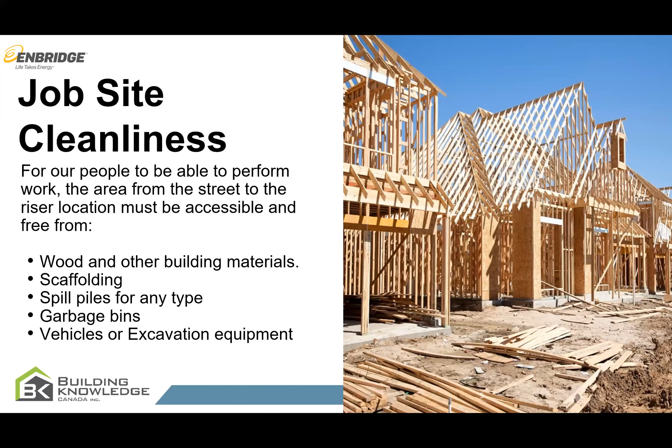So when we're coming out, and even for the safety of your own people, just make sure that you take some time to make sure the wood, the other buildings, scaffolding, any types of garbage or spills, anything that could be hidden under snow, which was a situation we've been experiencing - drywall and that type of thing become projectiles if you step on them when they're on top of ice. And the outcomes, like I said, can be life-changing for people. So just a quick reminder on job site cleanliness, and we'll go to the next slide.

Thanks, Stacey. Just a quick reminder to everybody out there, builders and HVACs, when you know that we're going to be coming to install, please remember to mark your meter location. It really helps us and you to avoid any sort of delays or ending up with a meter in the wrong spot. Please mark where you want the meter installed - just a little inverted T, with the bottom of the horizontal line letting us know the level of the final grade, and the vertical upright line indicating the meter riser location. Greatly appreciated, and with that, I'll turn it back over to Andy.

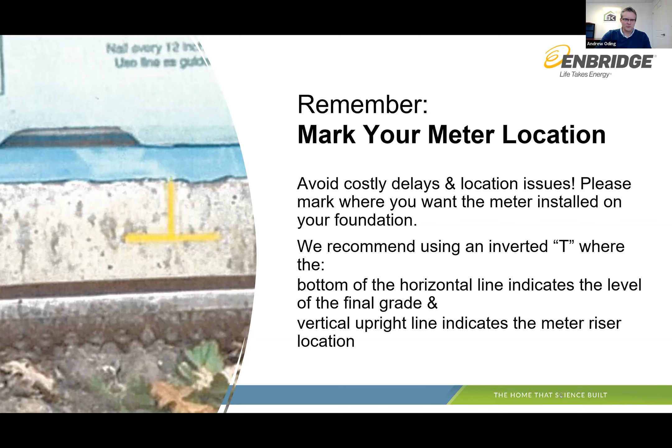Brett Cass - I actually found this sort of cool. I never realized Brett went to school in Pittsburgh, Pennsylvania. Spent a little time south of the border.

Brett has his bachelor's of environmental science. Brett was the first and is the longstanding technical manager for the net zero energy housing program and projects at Canadian Home Builders. Brett, you've done - you're a certified energy manager, your REA, your LEED Green Associate, all these things. I've often found it very cool that you understand the work that even we, some of us geeks at Building Knowledge, do, because you've done it yourself. So it's good to have you. Awesome, yeah, thanks a lot for having me. It's certainly a pleasure to speak here today.

It's like watching a horse race, Brett.

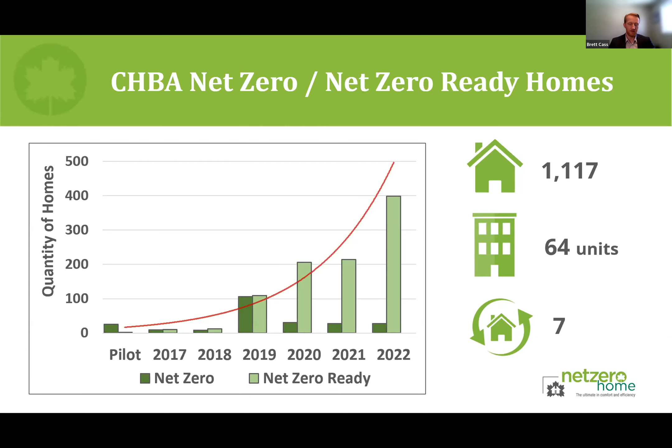Brett, do you have any sense of where things are going to head over the next year or two as far as those numbers? Do you expect them to go up? Do you expect them to level out? Not to put you in a difficult spot, but...

No, I mean, we do certainly from what we hear anecdotally from our energy advisors, from builders that have been reaching out, from the numbers at our training sessions, we expect the trend to continue to keep going up. So our training has been generally a big tell of what's going to come down the pipe. Often you see builders join the training and it takes a year or two to actually build the home and get the label through for their first label. Our training numbers have been really great, especially over the past year or so.

Very nice. So qualified participants - we were at 91 qualified net zero builders, as of 2022, with a few more coming in at the start of the year. Note that a qualified builder has already built their first home as well, so after they've taken the training, they've also built their first home. We also have 7 qualified net zero renovators, 48 qualified net zero energy advisors, and 13 qualified net zero service organizations across the country. So certainly some good growth in our qualified net zero participants alongside the homes.

All right, so moving away from just the general numbers, we're going to start looking at the mechanical systems - the average space heating and cooling systems that are used, as well as the domestic hot water systems. Starting with space heating, we've grouped the configurations on the left there, and the quantity of homes is on the horizontal axis. This includes both net zero and net zero ready homes, and for the most part, the whole data set for this presentation is both labeled types.

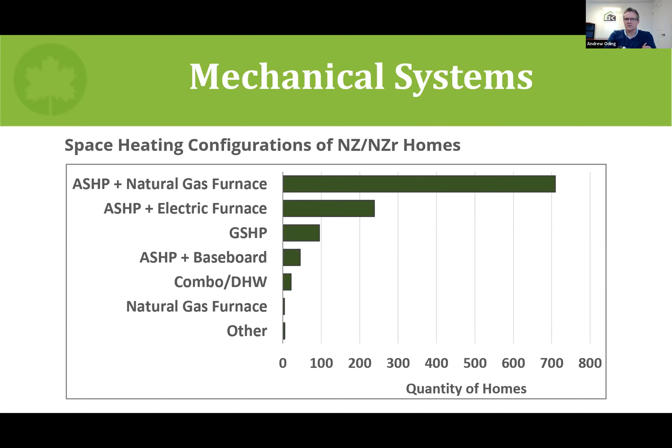So with that, a high efficiency backup, but it seems like the air source heat pump is starting to lead the way and be the primary source for heating and cooling as well in these net zero and net zero ready homes. It also speaks to the fact that a lot of the distribution system of the heating and cooling is ducted as opposed to non-ducted. There's plus and minuses about both depending on preferences, but it's interesting to see that a lot of it is ducted systems. Yeah, very true.

All right, so jumping to domestic hot water systems - what water heating configurations are these homes using? Largely, I think the word for this is just kind of conventional, high efficiency, but conventional. We're seeing gas instantaneous water heaters, obviously paired up with those gas furnaces in that group of homes. Also seeing just a conventional electric tank, and the heat pump is coming online a bit as well. More heat pumps have come through in 2022, but certainly nothing out of the ordinary on the water heating side of things.

It's so interesting to me that the air source heat pump hot water heater is as close to the regular conventional electric tank as it is. Yeah, I think that's a newer trend in 2021, 2022. It wasn't as high of a percentage in years past. So something newer that's coming on board.

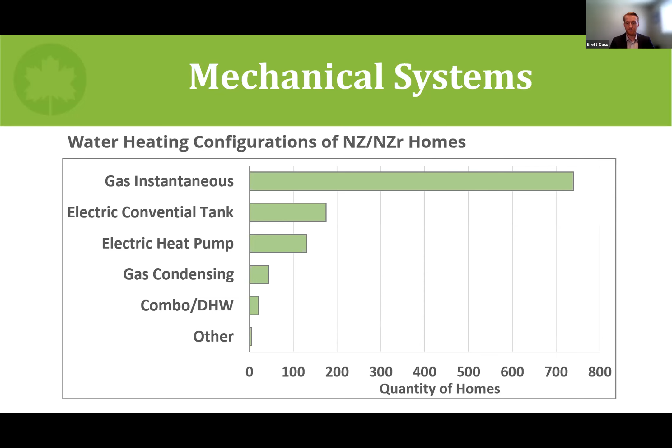Envelope performance. In this piece of the presentation, we're specifically going to look at the building envelopes, and we're going to look at it in a variety of metrics. We're going to talk about air tightness, some of the envelope improvement percentage metrics - those are the ones that compare to the reference house - and we're also going to talk about general building assembly, so what are the R values these builds are often achieving.

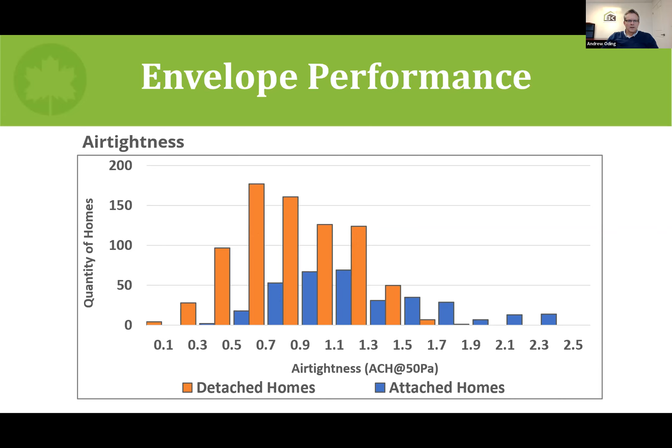Would you be comfortable surmising, Brett, that with the attached buildings - the MURBs, the townhomes - that almost without fail the builders are using an air barrier between the units to compartmentalize, going beyond code to do that? I don't have that data, Andy. You might be able to speak to that from the experience in your group. I have heard that anecdotally, but I don't have the numbers to match.

I would say that's typically what we see, but those are really good numbers all around for attached. Most of the time we do see it's achieved because someone thinks to put an air barrier between the units. So in this chart, we're looking at envelope performance in a different way - this is the envelope improvement over the reference house.

I'm sure most people on the call are familiar with the reference house, but as a reminder, the reference house represents kind of a code-minimum version of the actual home. The geometry is the same, but the assemblies and other pieces are brought down to code levels, so that you can compare how much better your actual home is compared to the reference house.

In this chart we do it in such a way that you're looking at only the envelope improvement over that of the reference house. We have the quantity of homes on the vertical axis, and on the horizontal axis we have bars for detached homes as well as attached homes, showing percentage. These are 2% buckets as well. I should also mention that in our program we have a minimum threshold of 33% better for the envelope improvement percentage - that's why the chart starts at 34, but very few homes are down in the 30s.

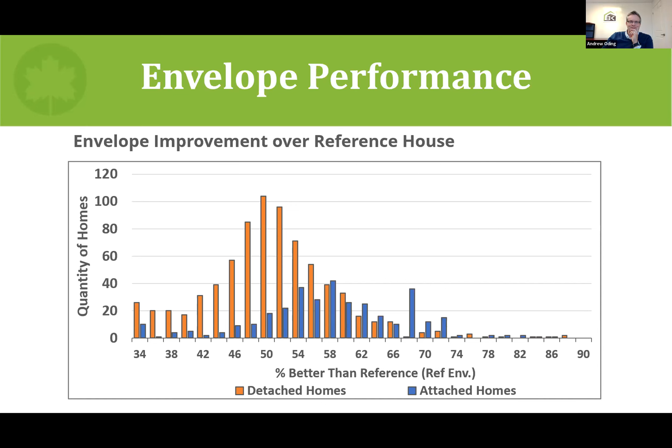Staying on the topic of envelope performance, now we're going to look at a metric most people are probably familiar with, which is R value. This is the thermal resistance, the R value of above grade walls, and we're looking at it by climate zone. Climate zone 4 is your warmer climate zone.

That's in green there, that's Victoria, Vancouver, moving up through climate zone 5 in Southern Ontario. Climate zone 6 would be places like Ottawa or Saint John, New Brunswick, and climate zone 7 is even colder: Calgary, Edmonton, Saskatoon. We actually have one home in climate zone 7B, our first climate zone 7B home came through this year, but we didn't put it on this chart because it's not statistically relevant.

But these are called box and whisker charts. So the actual box, if we look at climate zone 4, that green box represents the 25th percentile up to the 75th percentile, and the lines represent the remaining range. There are a couple outliers that didn't fit into these data sets and are removed, so the scale is relevant, but this represents 99% of the homes. The median, the average, is represented by the number in the middle.

What you'd expect as you go up the climate zones is that you'd see a higher R value per climate zone, which is essentially true between climate zone 5, 7A, and also true if I add that home from 7B. But the climate zone 4 homes seem to have gone higher. I don't necessarily know the reason for that, I only get the data. But one important piece to note is that there's only 14 homes in that climate zone 4 data set, where there's hundreds in 5 and 6, and 57 in climate zone 7A. So the data set isn't as strong as some of the others.

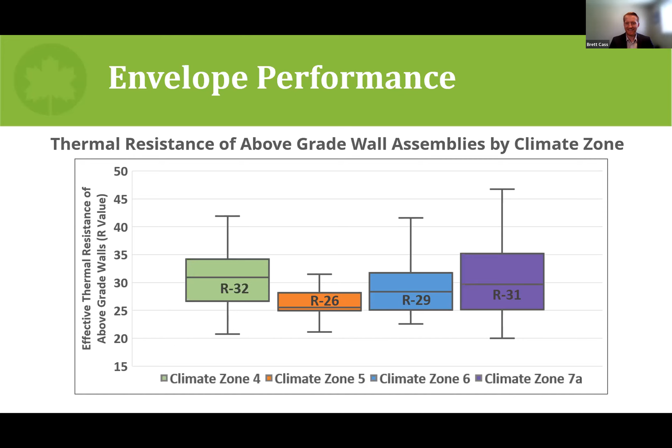Good. Now the next slide is the ceiling assemblies. Same approach, we're looking at the thermal resistance of ceiling assemblies. If I were to show them in box and whisker, they were relatively tight quartiles, so I'm just showing the average here per climate zone.

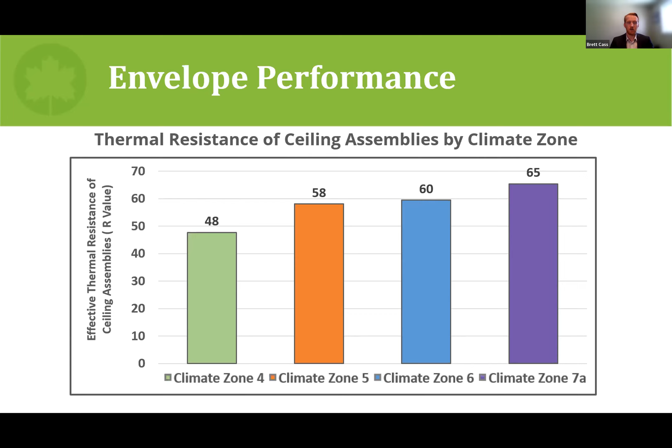And this is a more true curve that you'd expect: R48 in climate zone 4, up slightly in 5, up slightly in 6, and then up to R65 in climate zone 7A. Some builders are choosing to go higher, we do see the R70, the R80, the occasional R90 in the attic, but these are the averages, and they're relatively strong averages at that.

So now changing tides, moving away from the envelope performance and starting to look at the energy performance. We'll look at energy and envelope, mechanicals, renewables, and operational carbon a little bit later as well. But to start with, I wanted to show what a standard code-built home looks like on average, and then show what a net zero ready home looks like on average.

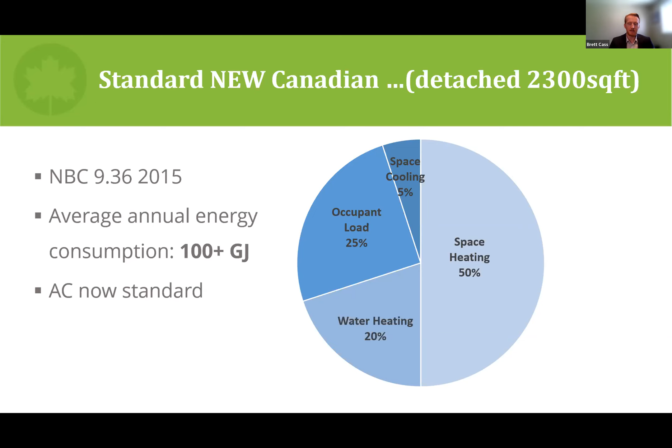This just shows the load breakdown to see where this energy is being used. This is a 2015 national 9.36 home, 2,300 square feet, detached home. About 100 gigajoules per year on average is what's being used. About half of that, so 50 gigajoules, goes to space heating. About a quarter is the occupant load, so that's your lighting, appliances. Water heating makes up 20%, and then a little bit for space cooling as well.

If we improve that exact same home, so that detached 2,300 square foot home, and made it into net zero ready, we bring it down to right around 43, 45 gigajoules or so. What's interesting though is that the load distribution changes quite dramatically. Now you can see that occupant load is making up over 50% in this case, and the space heating has gone down to only 25%, and that's not 25 gigajoules because this home is now only 43 gigajoules. So you're looking at just over 10 gigajoules to heat this home. Water heating remains a reasonable load, and then there's space cooling in there as a small load as well.

And the new load that comes on board is HRVs and fans. So the ventilation systems are starting to become a load that actually matters on the energy side. I know, Brett, you've broken this out too further in some of your reports and show what these averages look like for net zero ready multifamily, some of the MURB projects you folks have worked on, these multi-unit residential building unit over units.

What's even more glaring about those is that the occupant load hits 65 to 70% of the load, and the hot water load is almost the same as the space heating load. Yeah, or bigger, it can be quite dramatic. In some of our previous reports, we have some representations of that, and I do have a slide as well here that shows not multi-units, but it shows attached homes and compares to the sizes of the larger detached homes, and you can certainly see that occupant load really gets up into that 60%, 70% range in some cases.

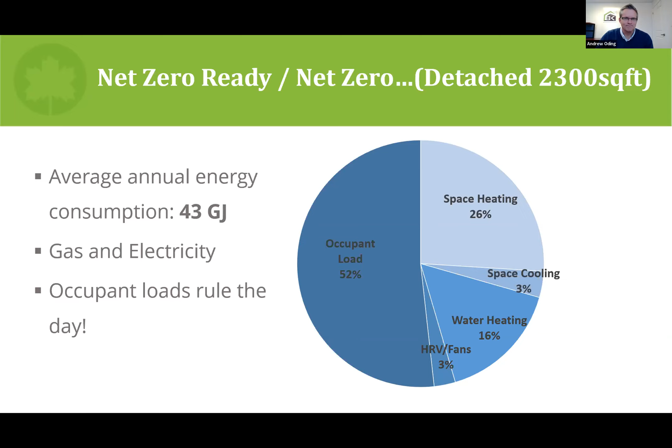That's something. All right, so in this chart, we're going to look at that total annual energy consumption, and we're going to compare it to the floor area. So on the vertical axis there, we have annual energy consumption in gigajoules per year. Then we have the floor area in meters squared on the horizontal axis, and each dot represents either a detached home with an orange dot, or an attached home, townhouse, row house in the blue dot. So these represent all of the homes in the program, and you do see a bit of a trend line upwards, which you'd expect. A larger home typically uses more energy.

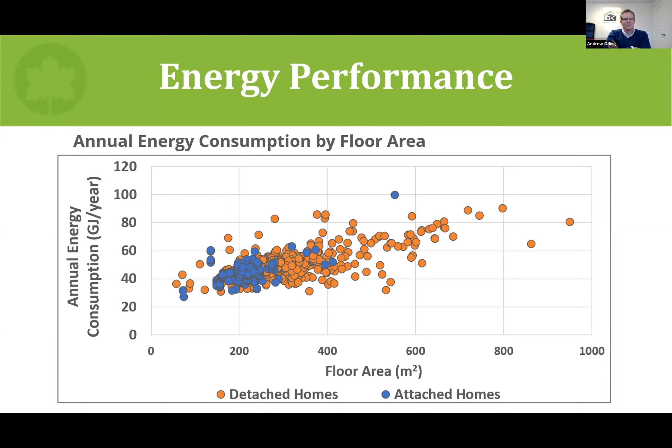I did find it interesting that there's a major cluster right kind of where we'd expect at that 43, 45 gigajoules per year rating. And obviously the size of the homes is more representative of the Canadian housing stock. Most are below that 400 meters squared, but still some larger homes that tend to use more energy. Interesting, starting to close in on a pure gigajoule rating maybe for net zero. Isn't that interesting? Potentially. So this slide is actually the one I mentioned.

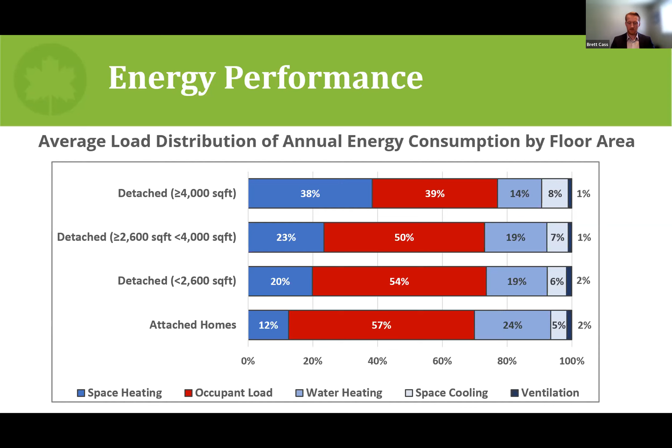So another energy performance metric we can look at is total energy use intensity. This is an intensity metric that compares the floor area to the total energy use. We're considering total energy use with all of the loads, so space heating, cooling, water heating, ventilation, as well as the occupant load, and dividing that by the floor area in meters squared, and that gives you what you'd call a TEUI.

Using a box and whisker chart, we can see that climate zone 4 has an average of 0.13 and a relatively tight 25th to 75th percentile box. In climate zone 5, we have 0.2, climate zone 6, 0.18, and climate zone 7A, 0.21. So again, similar to the R values, you'd expect an upward trend because of the colder climates. The only change is climate zone 5 is actually slightly higher than climate zone 6.

I don't have an exact reason for why that is. My hypothesis would be that there's different data sets there, different production builders using different methods. Possibly some of the climate zone 5 production builders are using a different approach than some of the climate zone 6 production builders, and because of their volume, that can make a big change in what these metrics are.

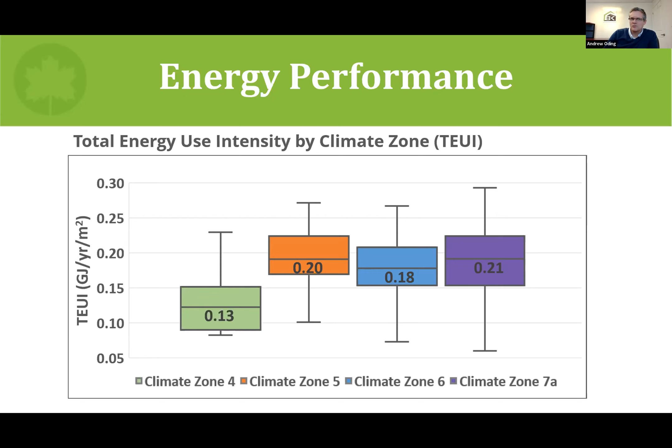Then another energy performance metric, the last of the energy performance metrics we'll look at, is energy consumption improvement over the reference house. Similar to that last envelope metric, this compares to a reference house, which represents a code minimum version of the house you're building. This volume of energy is all of the loads, except for the occupant load. So you're not looking at the lighting and appliances, only space heating, space cooling, ventilation, and domestic hot water.

And how that compares to the reference house load. Detached homes are represented in orange, attached homes in blue. Each bar represents a 2% bucket. We can see an average coming in on the energy side around 55 to upwards of 70 on detached homes, some as high as 85, getting close to 90% better, but obviously very few. And some very low, 30, 40%.

It seems that's in large part because of their geometry. Sometimes you have a home that just naturally has an extremely efficient geometry, and therefore the reference house is going to be pretty efficient, meaning it's going to be really hard to get a percent improvement that's too high above that efficient reference house. So wouldn't look too much into it.

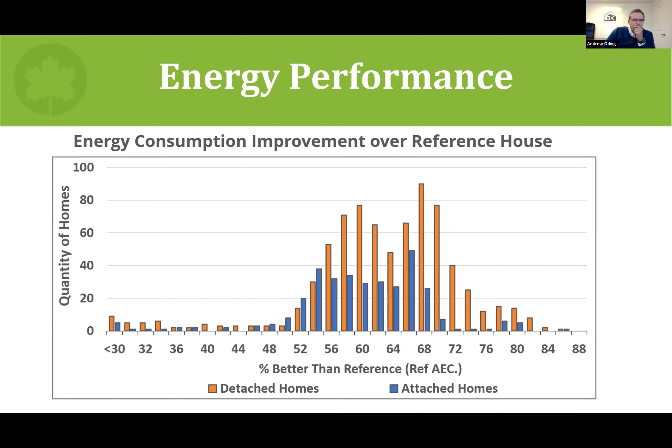Okay, so now we're going to take a bit of a different approach. We talked about energy, envelope, and found some trends. We talked about mechanicals and renewable energy, and I wanted to build some potential average homes for provinces that have a large enough data set. With those average homes, we're going to try and pull some operational carbon emissions information. I know that's a major topic now, so we can start to see what these homes potentially deliver on GHG emissions per year.

So the 3 provinces with the most homes are Ontario, BC, and Alberta. They each had enough data that we felt we could pull some archetypes. So I'll start with Ontario, and there's 2 sides to this slide.

Again, this is the average home. So I took all the homes and found out what their average energy use was. That was 47 gigajoules. I took a percent average of their occupant load - it ends up most of those homes use about 50% occupant load, and about a quarter is space heating. That lines up with those energy charts we've seen before. It certainly holds true in Ontario.

It's important to note that this average sized home is 2,800 square feet, and that includes the whole heated area. I think that's important to consider.

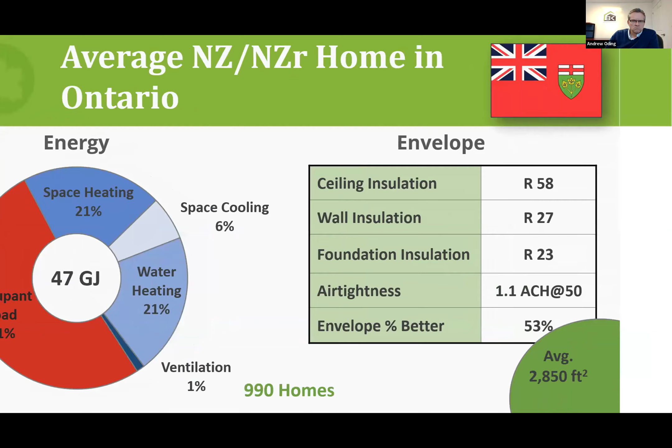But now, in order to get to that ultimate target of operational carbon, we need to determine if renewables were added or not. So we wanted to see, should we make this average home in Ontario net zero ready or net zero? Since only 12% of the homes in Ontario used solar and the rest remain net zero ready, we're going to consider this archetype home net zero ready.

It's also really important to consider the mechanicals if you want to get an operational carbon estimate, because the mechanicals are what is producing the operational carbon. So here we're taking the top 3 mechanical configurations, starting with space heating and cooling. The most popular was the air source heat pump plus gas furnace. We also had nearly 200 homes with an air source heat pump and electric furnace backup, and then some homes with a geo exchange system as well.

That's only one side of the equation for the mechanicals - there's also the domestic hot water. We wanted to see, are they using a gas domestic hot water system or an electric configuration? Gas is represented in orange and electricity domestic hot water in yellow. Of the air source heat pump plus gas furnace homes, the majority did use gas domestic hot water, which makes sense. The remainder used an electric domestic hot water, either a conventional tank or a heat pump.

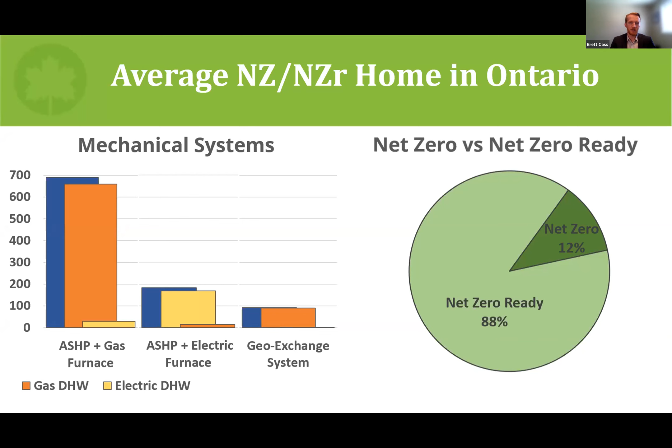So with that information, we're going to take a look at what the operational carbon might be. Remember on the right side, this is our average spec - this is the home that we built in our heads based on the average. So it's a net zero ready home, hybrid heated with an air source heat pump and gas furnace and a gas domestic hot water, and it's about 2,800 square feet.

We're using operational carbon emission factors from Ontario, of course. We need one for natural gas and one for electricity, and these are from Environment Canada's National Inventory Report. When we take the energy from natural gas and multiply it by the emission factors, we're getting kilograms CO2 equivalent per year of 630. When we add the electricity on top of that, that brings us up over 900 - so 900 kilograms of CO2 per year for that average net zero ready archetype home that we built.

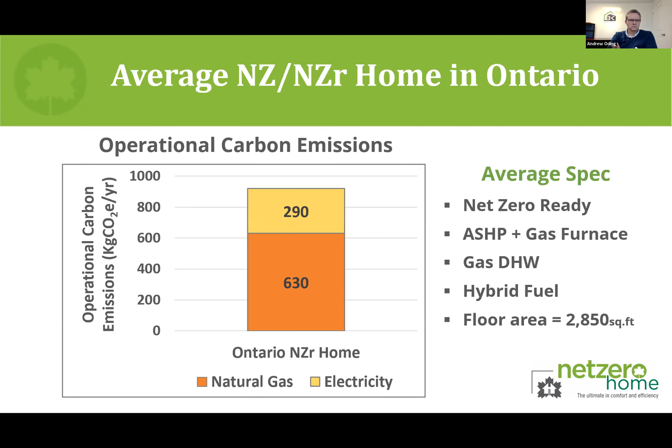Now we'll compare that to the other provinces and see what those homes look like. With BC, very similar on the energy and envelope side. Energy is slightly more - again, these homes are slightly bigger on average, 3,700 square feet. Occupant load goes down slightly, space heating increases slightly, and the water heating stayed roughly the same.

On the envelope side of things, we saw R56 was the average on the ceiling for the homes in BC, R32 in the walls, R22 in the foundation. Air tightness went slightly higher at 0.87, and the envelope percent improvement was 59%.

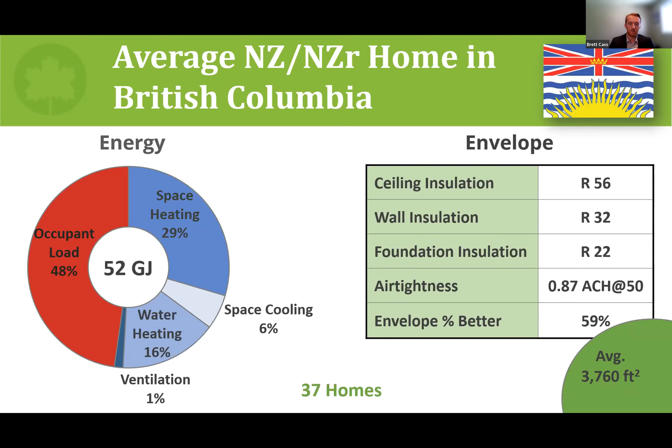So now if we look at, are these homes net zero or net zero ready? About an even split in BC with a slight advantage to net zero ready. So for this archetype, we're going to consider it net zero ready.

Now we need to look at the mechanical systems for these British Columbia homes. The most popular three were the air source heat pump plus electric furnace, then the air source heat pump plus baseboards, and then combination domestic hot water systems made up the remaining few. So no surprise, most of the air source heat pump plus electric furnace homes stayed all electric and used some type of electric domestic hot water.

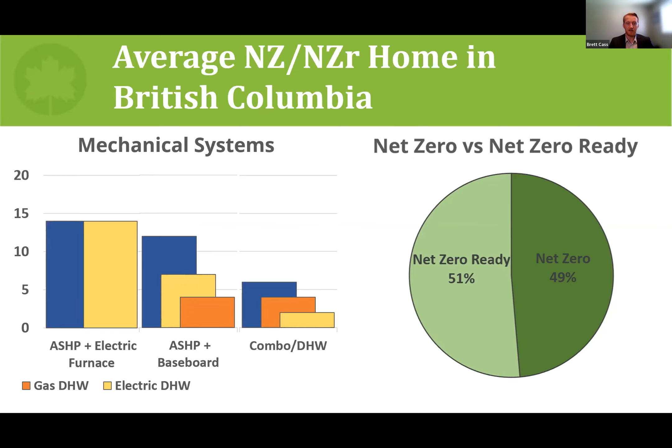The air source heat pump plus baseboard homes were about 60-40, mostly using electric domestic hot water, the remainder using gas. And the combo domestic hot water systems, most of them stuck with gas and the remainder used an electric system. So for this average BC archetype, it's going to be net zero ready with an air source heat pump plus an electric furnace plus an electric domestic hot water system. And it's on average 3,700 square feet of total heated volume.

Remember, when we look at the operational carbon, we're now switching to British Columbia's emissions factor, still from the National Inventory Report, but using their provincial utility data. And since there's no natural gas, this net zero ready home used only electricity, and it comes to 238 kilograms of CO2 per year on average. So that's interesting, quite a bit less than Ontario, largely because there is no natural gas being used in this particular home.

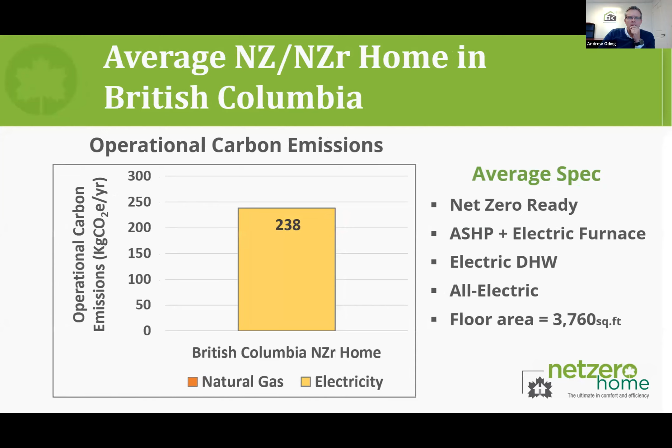The other thing we have to keep in mind is there's a lot of policy movements afoot that have affected those homes. Some of the projects we've worked on in British Columbia, you have city centers like Vancouver and others where there's either surcharges to gas or incentives to electrify. I'm not saying that's good or bad, it's just a very different scenario. You can see how that policy does impact, for better or for worse, what gets built.

No, absolutely, and there's more talk about policies making changes in a variety of fields. What I think is most interesting, and I'll show a slide about this later, is we're seeing a variety of operational carbon, but the homes are really the same. Right now I have the third set of energy and envelope data, and it looks very similar to what was built in BC and Alberta. So all these builders are doing really great things, very similar things to achieve net zero ready, but the ultimate carbon decision is out of their hands. That's really in the hands of the utility, the grid.

And it's estimates too, right? Day to day, hour to hour, those are going to change. Throughout the life cycle of these homes, these are going to change. This is just one year, in fact it's the year 2020 because the data comes out a couple of years later. So it doesn't mean these homes are going to produce that much every single year for 100 years.

It's interesting. Some of the questions that are going to be discussed at the upcoming spring training camp are: what kind of grid should we be designing homes for? What is the grid of the future? Alberta is three years ahead of schedule decarbonizing, their coal plants are now shut down, three years ahead. Ontario's down, the others are moving down. Should we be planning based on what's now, or what is going to be within 20 years? That's really important.

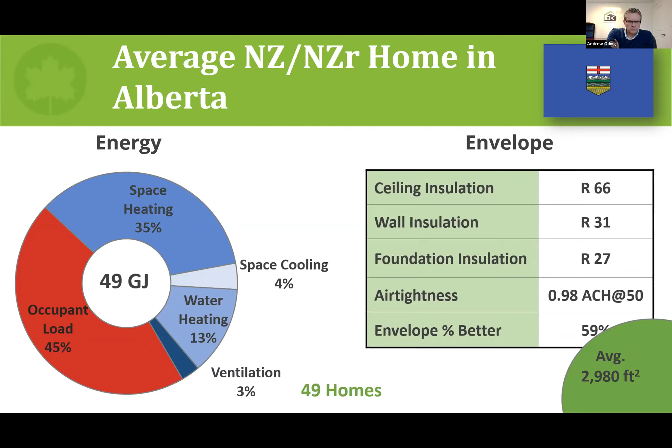So interestingly, and this maybe is a nod to the policy discussion, in Alberta 78% of the homes actually went full net zero and only 22% went net zero ready.

On the mechanicals side, the top 3 most popular were an air source heat pump plus electric furnace combo domestic hot water, and then the air source heat pump plus baseboard. When we add in the gas domestic hot water and the electric domestic hot water, that makes up 100% for that air source heat pump plus electric furnace home, which makes sense. I imagine those 31 homes were looking to go all electric. On the combo domestic hot water system, 100% kept the gas, and on the air source heat pump plus baseboards, 100% kept the all-electric approach.

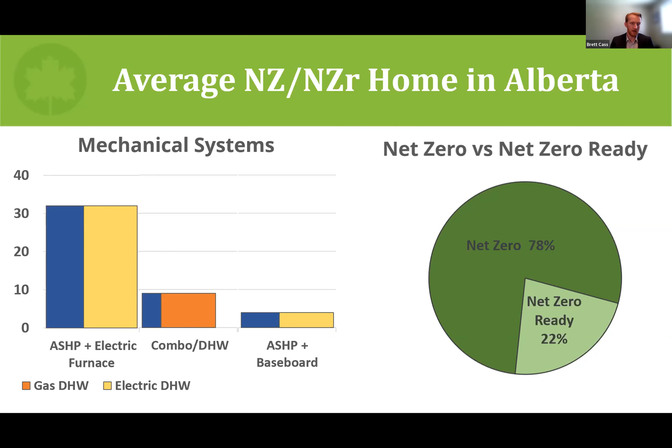So for this archetype home, we're going to take a full net zero home from Alberta that has an air source heat pump plus electric furnace backup, all electric, so the domestic hot water is electric as well. And that home is just shy of 3,000 square feet.

Again, switching to the operational carbon emissions of Alberta in 2020 — that's right, and this will have come down a little bit, and it's supposed to come down further in years to come. But what's also interesting about this home is that it is all electric and fully net zero. So even though it's in the high 7,000 kilograms of CO2 per year on its consumption, when you take into account its offset from being fully net zero, that brings that home down to zero on the operational carbon emission side.

So I thought it was quite interesting to see that we're seeing a lot of the Alberta homes going net zero all electric. And that's a very hard nut to crack, right?

Let's just stay on this point for a minute. In Alberta, because of the grid, coal is now sort of out of the picture, recently out. However, the grid compared to other provinces is fairly unclean — there's a lot of fossil fuels. So it is what it is, which is fine. But if you take homes and just move them to heat pumps and make them net zero ready, what happens is your grid emission, your actual CO2 emissions go up, versus just having a nice little natural gas furnace sipping away out of a half-inch line.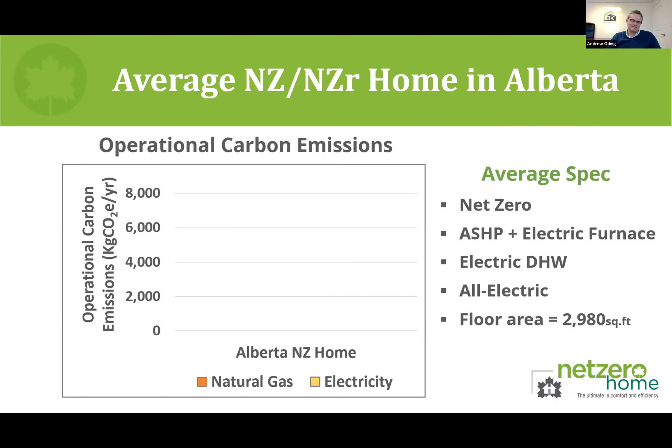So that's very cool. As someone asked — we've had questions, Brett, you and I both have some in the chat — you know, why are we doing net zero with gas and all that kind of thing. Dan Vivian's on here, Dan's a great engineer, does a lot of work, and he says, explain to me how you can be net zero and have gas, right? Like I get it, and those are really good questions we're all going to have to think hard about. But I think what we're seeing here is that right now the industry is responding to consumers that are a little cautious.

They want to do net zero, but they also don't want to see an increase in operational cost. You're also seeing results here where these are homes built in communities. What happens is if you build a community in some areas in Canada and electrify it, you don't have inexpensive gas subsidized for the infrastructure anymore, and that adds cost to the consumer. So there are real complexities we've got to figure out before consumers will say, yeah, let's electrify. So many decisions outside the design room really affect what comes of the home.

So the last operational carbon slide, comparing side by side again, a snapshot in time. The main reason we're looking at this is just to compare. We have homes built the same, right around 45-50 gigajoules, really good envelopes, but operationally that's in the utilities' hands, and things will likely change as years progress. These are the three provinces we just looked at, and these are the other provinces we have homes in. I'd also note this is only the energy consumed, not considering offsets from solar. Particularly in Alberta, 78% of those homes did install solar, so if I factored in the offsets, the average would come down dramatically. But it's certainly interesting to look at how the provinces differ on their emission factors.

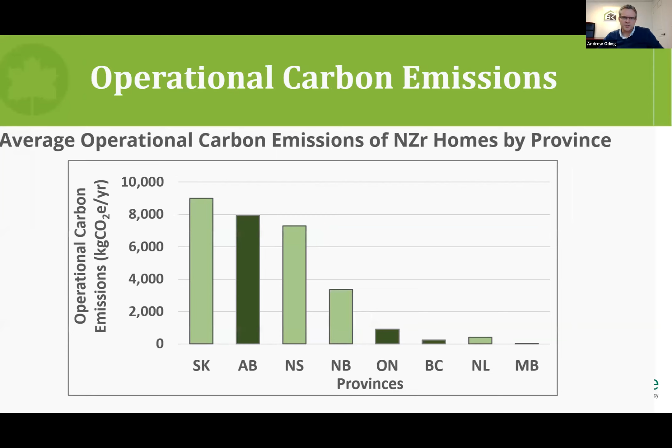Yeah, and it's interesting, the fuel decision one—we've seen a number of builders doing net zero ready communities here in Canada. When they do focus groups with consumers looking to buy in the area, there's a number of Canadians concerned about living in all-electrified homes because of a history of grid issues. They think of heat pumps as the old heat pumps we used to know, and they also want resilience. What happens if the grid goes down? Gas is resilient—I can run my fireplace, run a generator which can run the furnace, that type of thing.

So that's one of the reasons net zero ready with dual fuel has been used in some cases. But again, those same homes are prepared for the future. In most cases, even when the picture changes, they can still use the air source heat pump for most of the time to heat the home, if not all of it, but it leaves that decision to the homeowner for now.

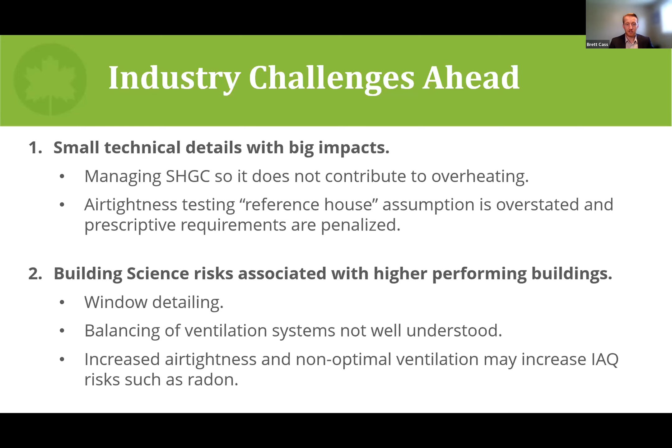On the building science side, there are building science risk factors associated with higher performing buildings when they're not done correctly. Window detailing challenges in high performance walls, ventilation becomes a major factor, and balancing ventilation systems in these tighter high performance envelopes isn't quite as well understood in some cases. Increased air tightness with non-optimal ventilation has the potential to increase IAQ risks such as radon. We talk about building tight and ventilating right. If that's not done, you can have indoor air quality issues. So that can be a factor.

The third industry challenge is that high performance HVAC requires high performance design. You can't have a high performance building envelope without a high performance mechanical system. If you do, you potentially get oversized mechanicals, which have risks like short cycling, humidity issues, and general discomfort for occupants. We do have F280, our heat gain heat loss standard in Canada, but it's not being used uniformly across the entire country.

Which segues to the next point, about building officials and builders across the country not widely using 9.36, or building officials not widely using the performance or prescriptive requirements in 9.36, and some provinces are only starting to enforce NBC 2015 and 9.36. So that's just an example of the many different levels of experience with performance codes across the country and the different provinces.

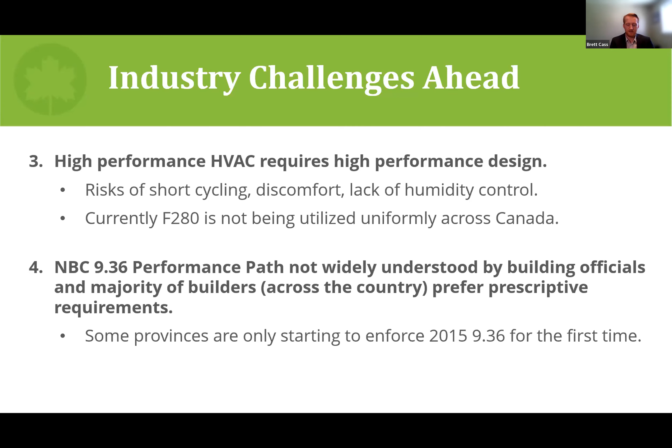So certainly some solutions that we feel the net zero labeling program in particular can help with. Industry education is a big one - we're helping builders, energy advisors, and industry stakeholders increase their level and get used to building high performance homes. On the optimization side, they're learning before it's mandatory, at a voluntary scale, how to optimize their buildings - what makes sense for them in their specific region, climate zone, supply chain, and with the stakeholders available to them - what's the best approach to get to net zero ready. We also have new indoor air quality guidelines that I'll talk about shortly that help address potential issues on the IAQ side.

So, Andy, I don't know, do you have anything to add on some of the industry challenges?

No, I don't. Those are all good. I will just say, I think it's going to be good when your report comes out that folks take a look at that. All those challenges - the right sizing of systems, the appropriate mechanical design, working with the building departments, all that kind of thing - are really big, still ongoing concerns.

Great, so I'm going to change tides a little bit. I know we have a lot of qualified net zero participants on the call, builders, renovators, so I just wanted to take a second to provide a reminder about our version 1.4 update.

That took place January 1st, 2023. It's been published, we had bulletins and reminders that went out, but I just wanted to send a reminder here, particularly about two of the bigger changes in that version 1.4 update, both of which are being implemented in a phased approach, which is a bit unique. I just wanted to explain that to everyone on the call if they're not familiar already.

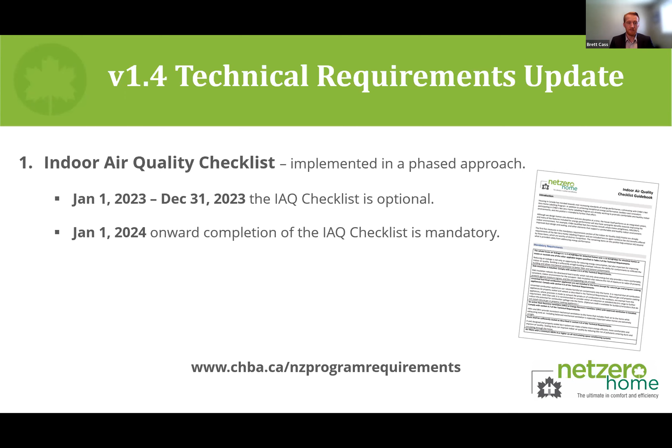So that's the IAQ checklist, optional this year and mandatory in 2024.

Good. On the envelope side, something Andy mentioned and I mentioned early, a comparison between that space heating load and that gross space heat loss. So this is the slide I was mentioning. The second big change is that our program, again in a phased approach, is changing our building envelope performance target. And that's because we're changing metrics from the old space heating load to the new gross space heat loss load, and I'll explain why that is in a second.

First, we'll look at the dates. So 2023 till the end of the year, it's optional to comply with either target. You can comply with the existing minimum threshold of 33% over the reference house when using the space heating load, and 25% improvement over the reference house using gross space heat loss. And we'll talk about why those metrics aren't the exact same number in a second here.

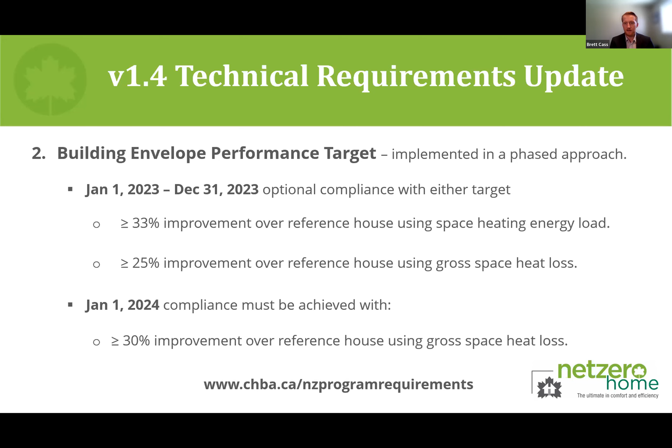Next year, enrollments in 2024, compliance will be achieved using 30% and only the gross space heat loss metric. Again, version 1.4 technical requirements is available on chba.ca/NZ program requirements.

So why the envelope upgrade, or why the envelope update? Why the change to the different metric? Well, there's a few reasons. One of them is that it reduces workload for energy advisors, and that reduced workload means savings for builders and ultimately home buyers.

So the reason it reduces the workload for EAs is because in order to get the space heating load metric and to ensure the home exceeded 33%, EAs needed to bring the information out into an external workbook and do a manual calculation. Now, because of where the codes are going, HOT 2000, the modeling software, has made an automatic output for gross space heat loss.

So that's why we feel it's appropriate, or one of a few reasons we feel it's appropriate, a time saver, a cost saver, to merge to gross space heat loss, again in a phased approach, so that everyone can do it at their own speed and is ready to do so. So that's the alignment with the other industry metrics. Obviously, as the codes start to adopt this, it's going to become the norm. We want to make sure we align with the norms.

Also, arguments to be made that the gross space heat loss metric can be a truer metric if we're looking at just measuring the envelope efficiency. So that's always positive. And you'll note that we started with 33% for space heating, and we didn't use 33% for gross space heat loss. And the reason for that is because it's not a lateral comparison.

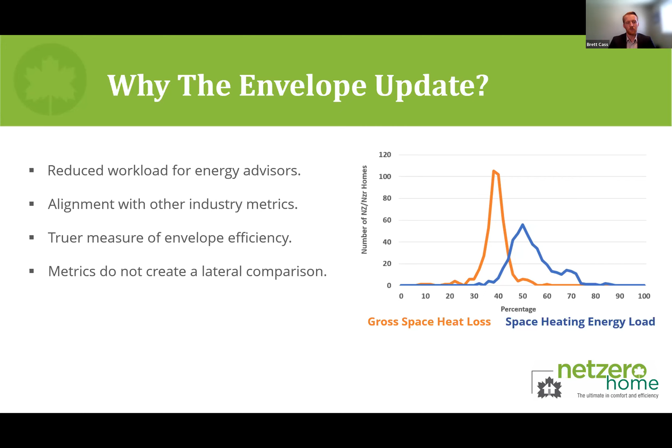I'll just take, did you have a question on that or anything, Andy? No, we got lots of questions though, Brett. We're gonna have to do rapid round.